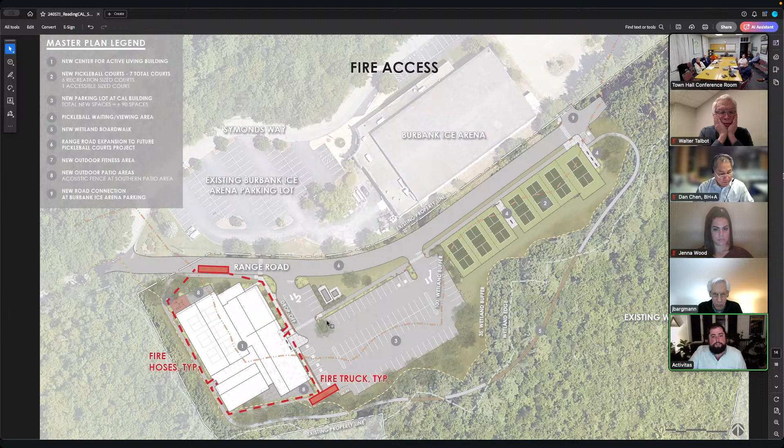Conceptually, this is not based on the most recent iteration, but the second to last one. Based on the site, there are still some unknowns, not having an updated topographic survey. We are still reviewing the geotech report with the geotechnical engineer to determine the subsurface conditions based against our design.

But the intent right now is to do all subsurface detention, be it Cultec or chambers under the parking lot. It would not require us to need that landscape area in the front for filtration. So the bulk of the parking lot, or the larger unit, would be handling the Cal site, and then there would be a secondary unit that would handle pickleball.

Again, this is early. Obviously looking for feedback, concerns, but we'll update this eventually for the new design if that does work.

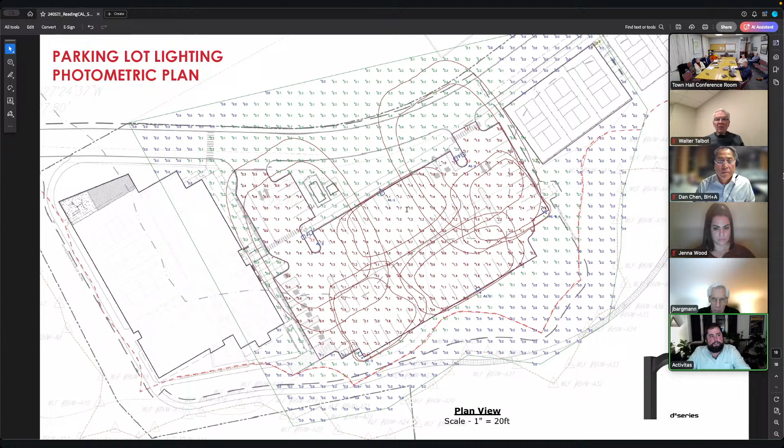I'm going to take a sip of water and open it up for questions.

One other thing: the building is intended to be used as an emergency shelter, managed by the fire department. Steve pointed out where the generator was on the site—we pushed it up to the road for service. There's no gas service on this range road, so we either have to bring gas in, use propane, or consider a diesel generator. That hasn't been decided yet, but to serve as a shelter for storms, heat, and other events, you need a 24-hour whole building generator, and that is being provided.

Okay, you folks ready for questions? I'll take that as a yes.

Walter, do you have any questions or observations you want to bring up? Do you want me to go over the purpose of the working session? Sure, that's a good point. I can go over it for the commissioners.

This is a working session, which means it's not a hearing per se. We're not looking to close or vote on any approvals. This is intended to give comments and observations to help the town decide how and what to do about this. This is our chance to make clear anything we believe has to be considered in the plans. If we have any concerns about what we've heard already, recognizing that it's a conceptual plan at the moment, now is the time to raise them.

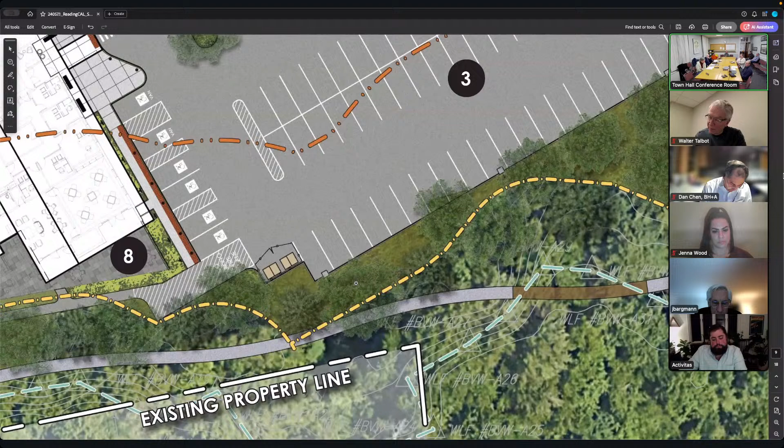And with all this paving, you're talking about Cultec chambers. How would the parking lot be sloped to get the water to flow the way you want it to go? Right now we don't have an actual topo survey done, it's still early so grading hasn't been considered to this level. But we're using a mix of traditional grading with catch basins, and the goal would be to grade away from the buffer towards the underground units.

Can you show where the openings to the underground units would be, using your cursor on this plot plan? Like the discharge - how does the water get into the underground? All these dashed lines are pipes. So there would be catch basins along those pipes? Catch basins are in these circles, all throughout the site. Everything works its way through a network of drainage pipes to the subsurface chambers, letting it recharge, and then out.

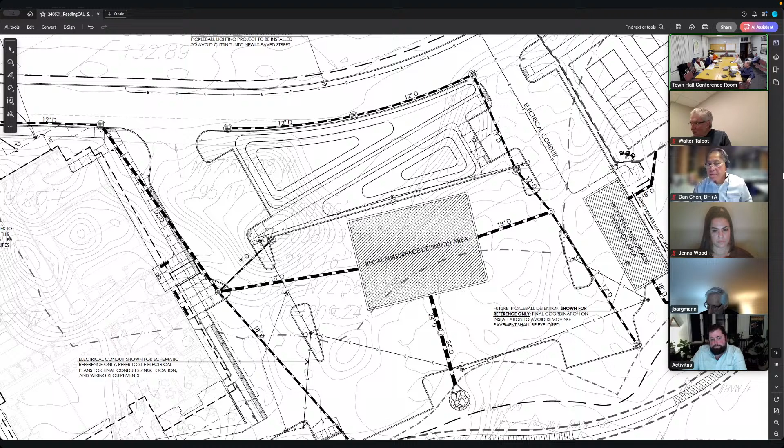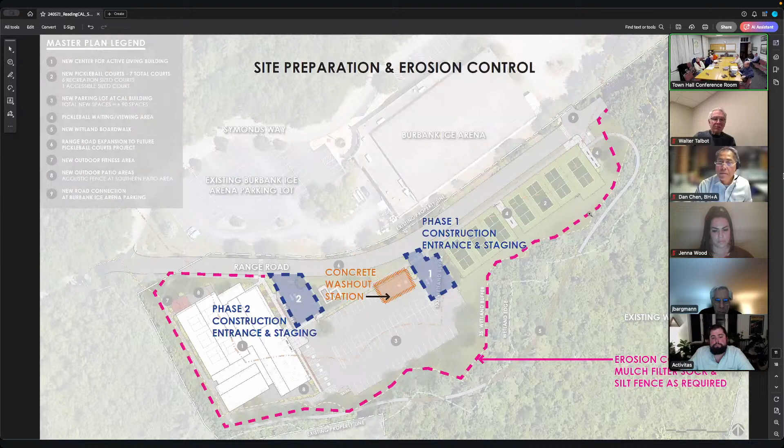You were talking about possibly diesel or propane generated electricity. Is there any possibility of putting solar panels either as carports over some of the parking spaces, or on the roof of the building, to provide backup electricity source for the building, or some electricity for that purpose?

The roof is designed to be solar ready. One of the studies we're doing right now with the permanent building committee is whether the main portion of the building would have a flat roof and could have more solar panels than we currently can have, since it has pitched roofs on the building today.

The requirements in Massachusetts for an emergency management shelter are that you have an all-building 24-hour generator. So you can have solar to help supplement it, but you can't rely on solar in the event of an emergency, especially in winter with an ice storm or snowstorm. So we could rely on solar for some backup, but it doesn't preclude the generator, and it doesn't allow the generator to be downsized.

Okay. I'm glad to hear the roof is solar ready. I would love to see, as part of your plan, information about calculating some payback times between the cost of putting the solar panels on and the savings in electricity.

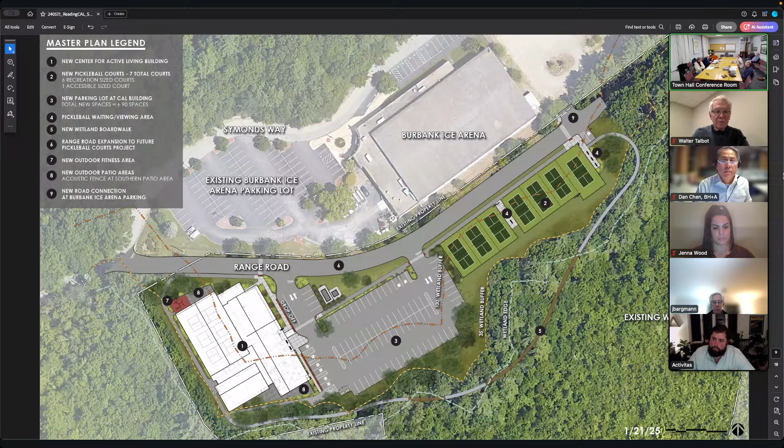No, it's good, and Chuck has also expressed that as well, so I think - not as well, couldn't be possibly as well as you - but no, I appreciate that, and I thank you for that. So I have some other questions.

Is there going to be a fence around the courts? Yeah, the perimeter of the courts would have a 6-foot fence and then some 4-foot high fence dividing them. Okay.

All right, so obviously that's very near the 35-foot, so it's probably worth showing it here so we can understand what, if any, encroachment there is into the 35-foot. Isn't the fence on the back side of the court? The fence is within the court. Oh okay, I was thinking it was beyond the manicured lawn, outside of the court. Everything is contained within that perimeter. Good.

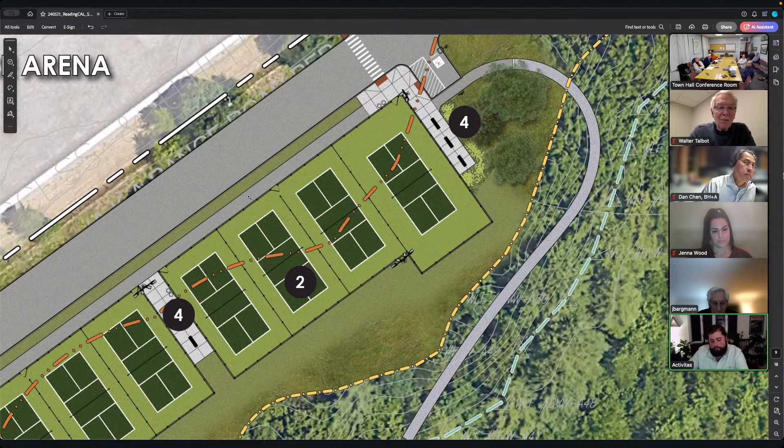So I have thoughts also on the parking space. It's no surprise, we're always looking to minimize surface coverage. Walter talked about that to some extent. So is there a way to have less parking and count more on people coming across the street from the Burbank parking area?

The reason I'm thinking is that side of the building is more the community center, so it won't be so many seniors per se - there'll be people who are more able and willing to walk. So perhaps that's a way to minimize the parking. Actually, when you look at it, the distance to the back of the parking lot is further than going across the street to the Burbank parking, depending on how far you go in it. So I'm just trying to understand why you had the constraint of 90 spaces there as opposed to taking advantage of more across the street.

The 90 spaces is based on the use of the building during different scenarios, but the hours of operation of the senior center dominate the use charts and the capacity of the building. On a typical day, there could be a lunch program, and that room itself holds 100 seats at lunch easily.

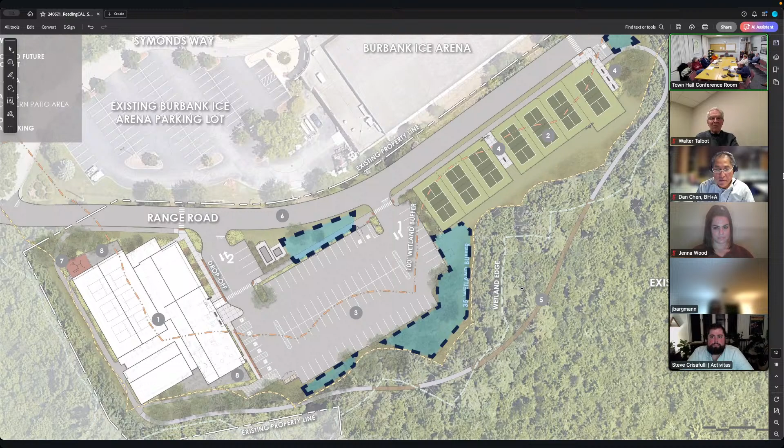What I will tell you is I have come to learn something quite interesting about our pickleball community that I didn't know - I don't play pickleball, I probably should - but this is a population that will play in all seasons. So I don't think we can store anything on those courts, because they will be out there using them at every opportunity. Mr. Coldman, correct me if I'm wrong... but am I wrong? You are 100% right. So, 30 degrees or higher - they are a tenacious group, I admire them and need to get on board with pickleball.

It's a good point, but I also wouldn't want to put money into the design and then store snow on it if we could avoid it. I had one more - we'll have the usual conditions like erosion control in place before construction started, pre-construction meeting, those kinds of things, right? Those are the standards.

One last one. All right, so if you could go back to the conceptual drawing - not this one, the one, no, yes, that one. It looks like there's either a new or rehabbed road going right up to the Y, where it branches off to the left to go to Burbank.

Is that just the way it's drawn, or is that correct? This is new - Range Road would be expanded from the connection at Symonds Way to just beyond this curb cut entrance to the back of the parking lot. The reason I ask is because that part looks like it's maybe the closest to the buffer - in fact, some of it's inside the 35-foot setback. All right, I was just wanting to be sure that you are gonna be paving there.

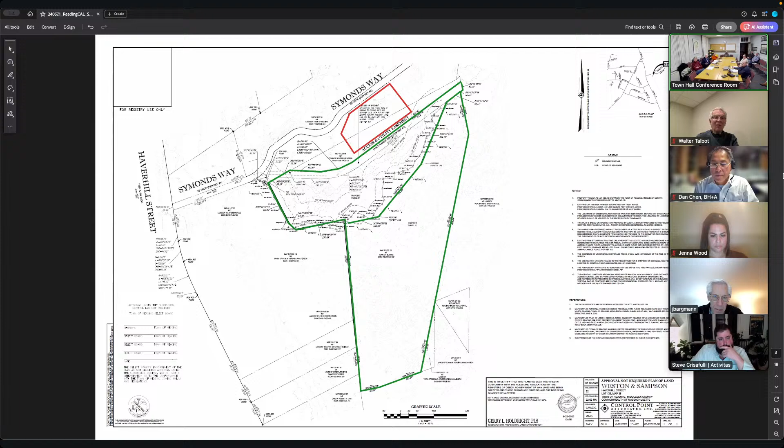That section's already paved where the yellow line is. Yeah, that's what I was asking, if it's gonna be rehabbed or anything - are you doing any work on it, any milling? The plans don't show the existing size of the road and what you're expanding it to. Regulations allow you to do maintenance, but not substantially enlarge the existing road - if you do that, you fall under a different section of the WPA. So it would be good to have that information when you come back for your notice of intent.

We'll have all of the existing conditions cleaned up with more information, but this dashed line is essentially from here to Symonds Way - it's about an 18-foot wide road, which isn't two-way, so it has to be widened to allow for both of these uses to be implemented. All the more reason to get some mitigation.

Martha, you have another question? Yeah, I'm willing to go after our public person. Lucas Prado, 85 Hancock. Oh, I'm sorry, we should do commission first, okay, and then Chuck. Okay, fine, pardon me, putting them back in order.

My question is that the whole back of the building and the path behind the building is right up against the 35-foot line, or even the path goes over the 35-foot line. And often there's a lot of construction vehicle traffic behind where a building is going in. So where would you put the erosion control on that side of the building where you're so close to the 35-foot line?

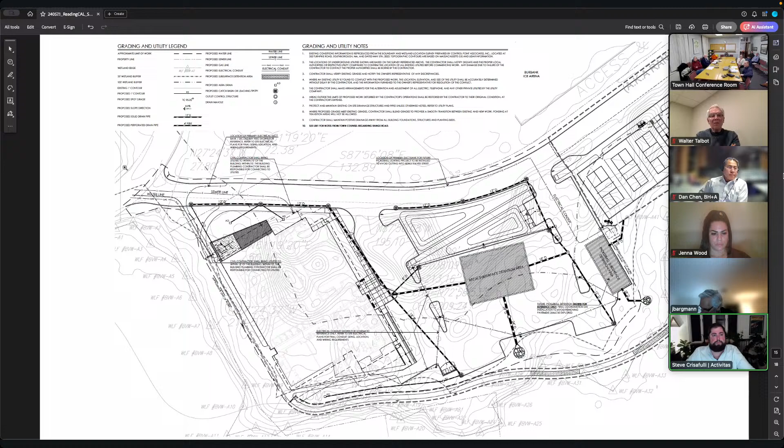Would we know where the 35-foot and 25-foot lines are on the plan? We'll show the 25. We're currently showing 35, which is, I think, what we've shown on other projects. We'll typically show 25, 35, and 100. So that's what should be on the plan.

So what's prompting the question - in Reading, the first 25 feet is no disturb, the next 10 feet up to 35 total is no structure, and then the 100-foot buffer is the larger one. So that's where Martha's question is about keeping the construction vehicles entirely out of that 25-foot area. Okay, well, we'll work that out.

That's it. Okay, two more questions. Could you describe in a little more detail what the design requirements are for dark sky compliance?

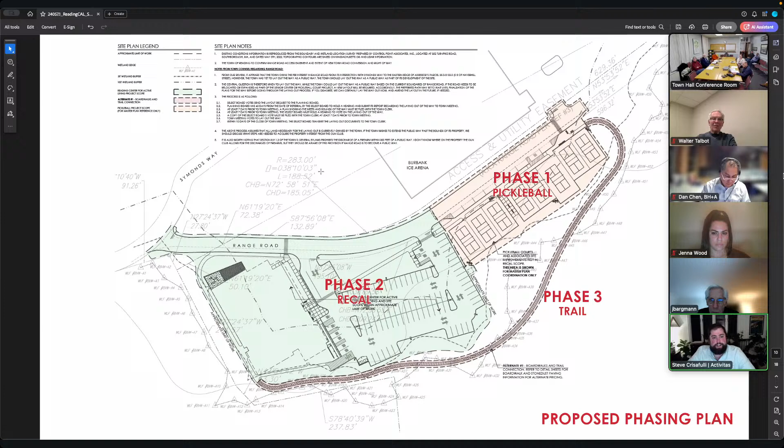For lighting, we can follow up with that. I'm not an electrical engineer, but we did go through this very heavily on a recent project at Birch Meadow, and it's relative to the light spread. Hang on one second. We can follow up with that.

You showed a difference between dark sky compliant and dark sky friendly, but you said dark sky compliant? It is dark sky compliant.

You showed a figure with emergency fire access. I'm just curious, is there a way to ensure that in the event of a fire the spray water could be directed away from the wetland, or somehow contained so it doesn't run off into the wetland? I guess I would have to send that question to the fire department, I'm just curious about public safety.

Once these pickleball courts are constructed, does that mean the tennis courts, for example, at Memorial Park would be used only for tennis, or would those also be open for pickleball? Conservation question.

That's a Jenna question, I think. I think the intention is that pickleball play will move from Memorial Park to these courts because of the noise complaints we get from neighbors and the accessibility issues at that court currently. These courts will be far more accessible to our population of pickleball players. Eileen, I think, is in the meeting as well, so she could speak to that, and Michael's on the call too if they want to chat about that.

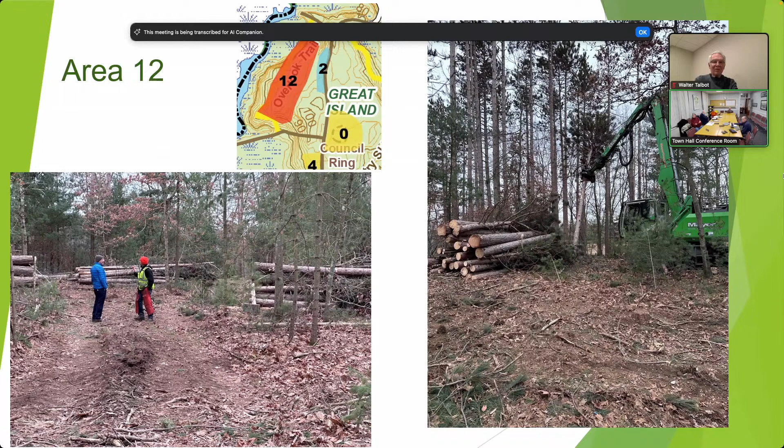Area 12 was an area where we could use equipment because it was flatter, and it was easy to get the equipment in there. You can see the pile, that's a piece of the machinery. Let's see if this works.

Yeah, see how it grabs the tree up near the top there, and then it brings it down. You can see the other maples around it sort of swaying, but with this piece of equipment, it's much more surgical than just going in and cutting it down like that, as can be done with other pieces of equipment.

And then from there, those trees were brought to that chipper, and the chipper chipped them up and they brought them into those trucks and were able to haul them away.

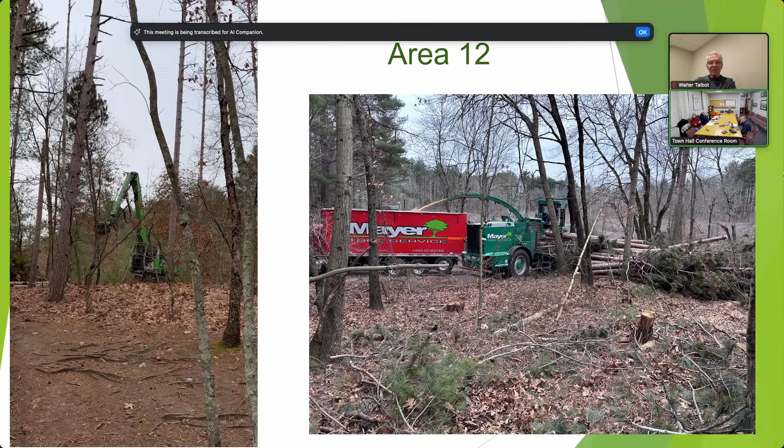And area 13 was much like area 5. It was up on a narrow trail, a narrow esker, and so those were likewise dropped and laid parallel, perpendicular to the slope and in contact with the ground.

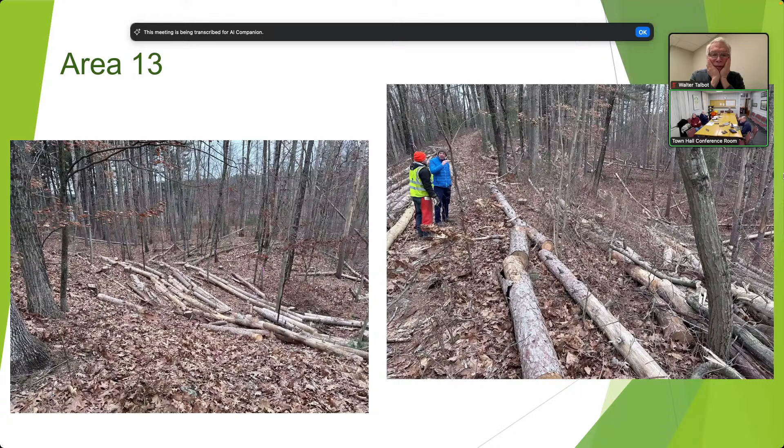And that's the last one. That's pretty much the presentation.

So we had a site walk on the 13th, Monday, with Chris Pryor from Department of Conservation and Recreation, our service forester who covers the area, Bill Benjamin our certified forester, Chuck was there, and Dan Mayer of Mayer Tree, and Mike Hannaford our tree warden, and Mike Hessman from DPW.

So Chris Pryor, our DCR service forester, was very pleased with the work. He actually sent me an email, which I could just read a couple lines of, if you're interested.

He said, I've been impressed with the work in the Reading Town Forest to ensure public safety of all users, but also to consider future health of the forest as a whole. There are plenty of other municipalities who are not as thoughtful about management of the town forest. The recent harvest, like the 3 phases that I've seen, followed the approved forest cutting plan and forestry best management practices.

And additional recommendations of the Natural Heritage and Endangered Species Program. The forest is well suited to provide the residents of Reading a multitude of benefits into the future, including recreation opportunities, water quality protection, wildlife habitat, and carbon sequestration.

And Chuck can certainly speak to that final site visit and what he heard from the foresters there. Happy to answer any questions that you have.